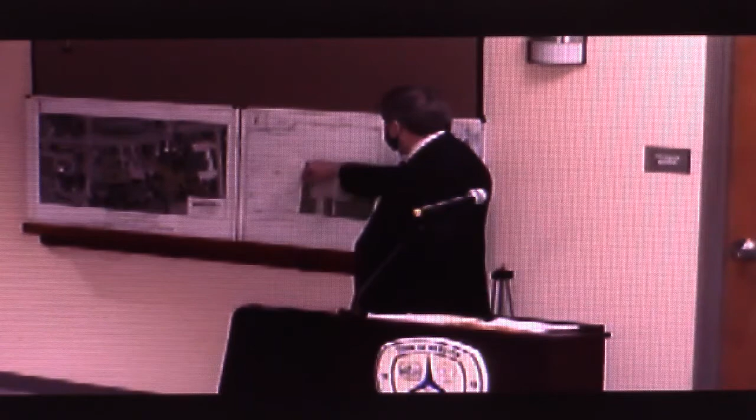This is part of the property which is owned by Ridge Road Webster LLC. The remainder of the property, as shown here, there is a house on the Jackson Road frontage which is going to stay. There are two houses here which are going to disappear - two lots along the Ridge Road frontage - and with a little bit of adjustment of lot lines, that comprises the Jiffy Lube parcel. That parcel is slightly less than the 45,000 square feet required in the MC district, and for that reason we will need an area variance.

In addition - I'm just going to hold on to the microphone - in addition, we will be applying for a use variance to allow the use as a Jiffy Lube at this particular corner. It's deemed to be an automotive type use, which is not a permitted use in the MC district.

However, there really is something very nice about this particular use on this corner, and that is that the Jiffy Lube operation is a traffic desert, if you will - there's no intensity of traffic on the site. The average number of cars utilizing the Jiffy Lube facility is typically between 30 to 35 a day, as opposed to if this were a standard MC use, which could see 30 to 35 cars per hour. That is really the benefit of this particular use at this location.

So Jiffy Lube itself has made inroads into the Rochester market with their newest development - it's actually a multi-care center. There is a location in Henrietta, which is in an out parcel in front of the Regal Theater.

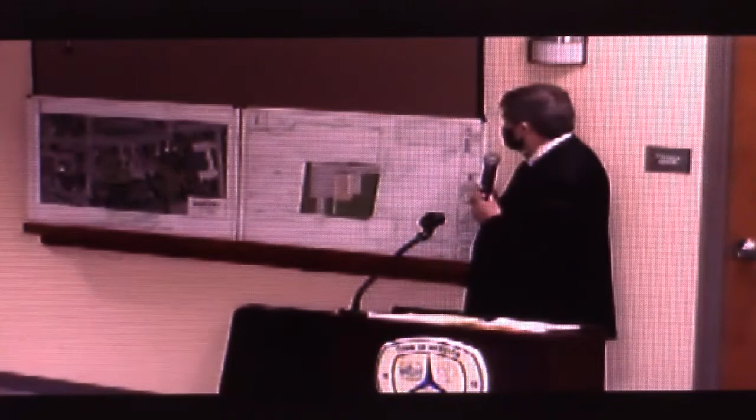Access to the site will be from two curb cuts, one on Ridge Road and one on Jackson Road, which is also a substantial benefit from the existing condition, which had multiple curb cuts on Ridge Road, and at least one on Jackson Road. So we are doing our part to benefit traffic, and of course we will have to have review from Monroe County Department of Transportation, Jackson Road being a county road, Ridge Road being a state road.

We had some early design on our elevations. We know the town's design guidelines are looking for something a little bit different, and we're going to be working on that. But typically the building would have a wainscot, a lower level with a particular architectural design, and then the upper level would also be somewhat different.

We're talking about darker earth tones on the site because we think that's in keeping with the development that has occurred along the Ridge Road corridor. Brick is being heavily considered, and we'll be prepared to discuss that further when we come back for formal site plan approval.

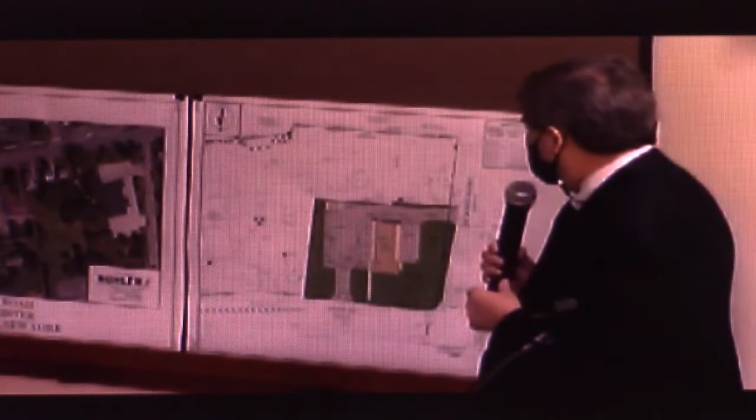Typically we see these Jiffy Lubes on a lot smaller parcel than the one we're talking about here.

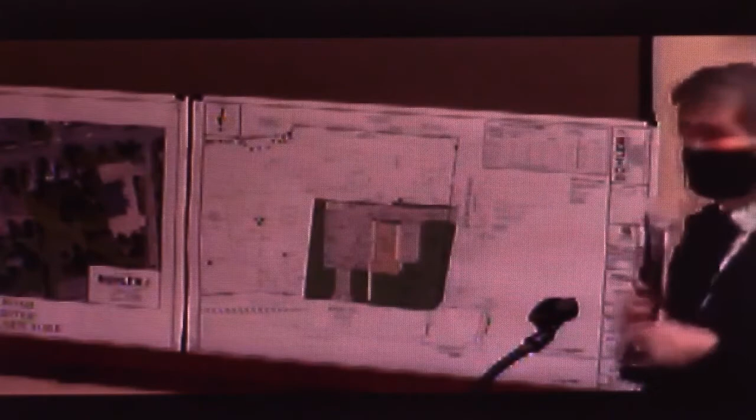You mentioned something about sign guidelines? Design guidelines, I'm sorry. We will ultimately be coming back to the board with sign guidelines. We do show some on the draft elevations submitted with the application, and we'll be doing an analysis of whether it totally conforms with code or whether it needs any relief or variances. We'll be taking a more critical look at that as we move to the next stage.

That was the point I was going to bring up tonight. I just thought there's an awful lot of signs. I hate to seem like Mr. Sign Guy tonight, but there seems like a lot of signs for one building, especially on the front elevation. You've got Jiffy Lube, and then Pennzoil, which I don't know if that would be considered a separate sign or not.

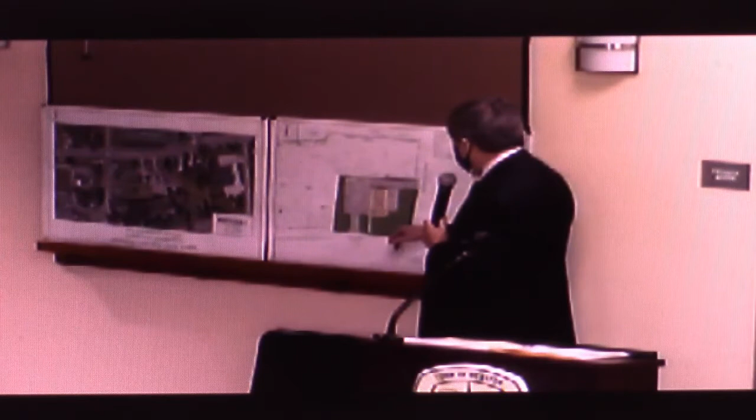That's something we'll review. I don't know if the measurement of the sign constitutes a box around the entire element or whether each piece is measured separately. I believe the code addresses that. We may need a variance for the second elevation. We're also talking about a monument sign, which is permitted under the code. That will be coming back as part of the site plan application and review. So thanks for that comment, Mark.

What's the code say, you have to have 45,000 square feet? Was that the lot size number for MC? 45? And what have you got, Jerry? 30? 34,936. 35. But we're really boxed in.

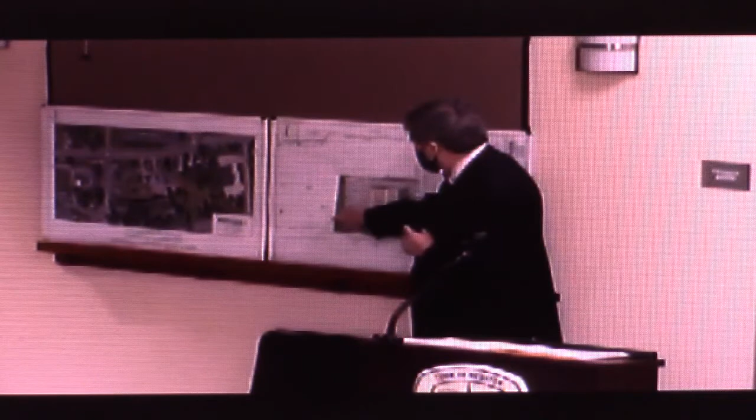There's really not much we can do because we're going to need a side setback variance over here for the house, literally, and this building is very close in that location. On that drawing, right where you had your finger - yes, go to the south, go to the south of the property, now go back to the west, where the property line is.

There's like a jog in it. Yeah, right over here? Yeah, there's a... okay, what am I looking at there? I'm not sure. Do you want to address that?

It sounds like it may have something to do with this easement, with the shed. There's an existing shed over here. We're trying not to disturb the remainder of the property, and that's what's really causing what we're doing. That little shed - it's on the easement there, isn't it?

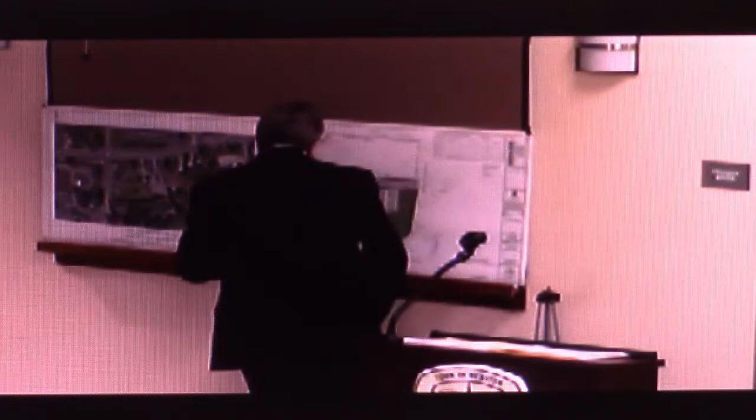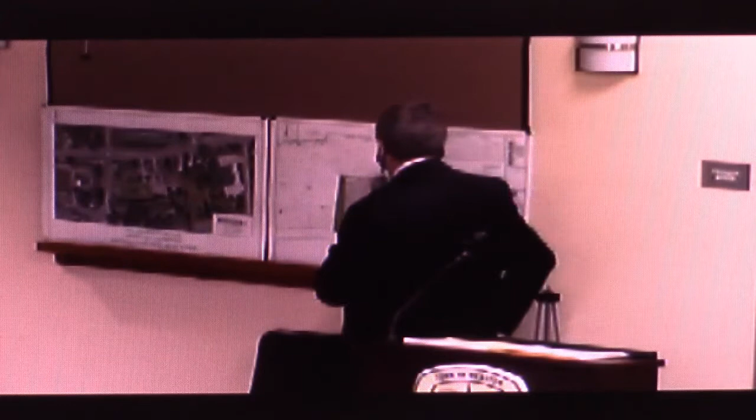I'm not sure exactly where the sewer line is within the easement. We show a center line, but I'm not sure exactly where it is. I trust the shed is not sitting on the easement, but I think we'll probably figure that out as we move forward. Well, the easement is the whole width though, right? Yeah, the easement is the whole width. But if the shed pre-existed, I really don't know when that sewer easement came in and for what purpose. I'm not sure what was there first.

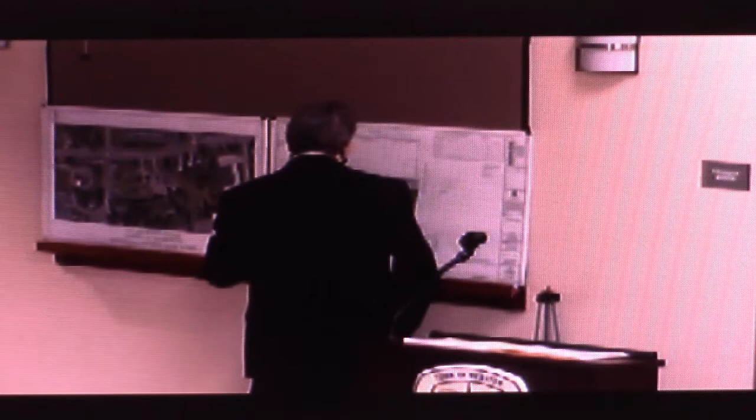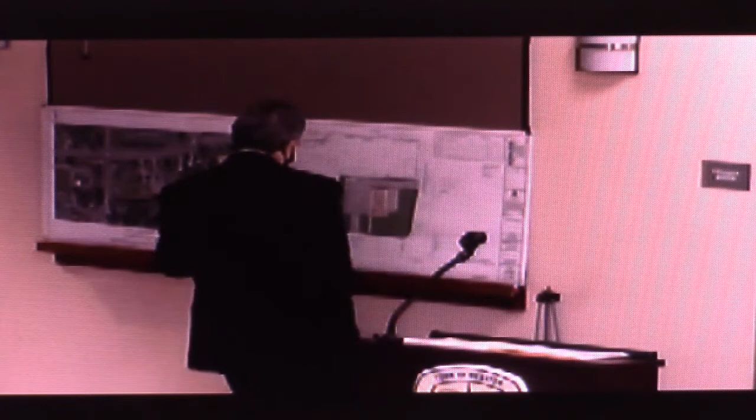What kind of a shed is it - is it a good shed or? What I'm getting at is, just to minimize your variance, if you could move that - it looks like it's probably about 5 foot, that jog, maybe? 4.3? So if you moved it up, you'd get another 4 foot by the length of that, which would be another 500 square feet - you'd be a whole lot closer to what's required.

Somewhat closer anyway to what your required square footage would be - you're minimizing it anyway. Yeah, we understand that. I don't know how important the shed is. For the record, my name is John Marth, Guggenheim Development, sorry.

Yes, I think really it was just as simple as - that's part of the retained lot. We saw that the shed was there in existence today, so we were just trying to put a small jog on the property line to honor and give that shed a little bit of space off of the new property line. That was really the only intention there.

That's something we can explore and take a look at. We would have to ask the existing property owner what his feeling is relative to that, and see if we can come up with something. But if we have another 500 square feet, we're still just shy of 40, so we would be in a variance situation in any event.

I'm surprised they didn't have the shed further south, not on the easement area, but. Yeah, like I said, I'm not sure who showed up first - whether the shed was there first or whether the easement was there first.

From the looks of the site, it looks like almost everything was there before anything else was there. So, well, anyways, there was a comment in there about that.

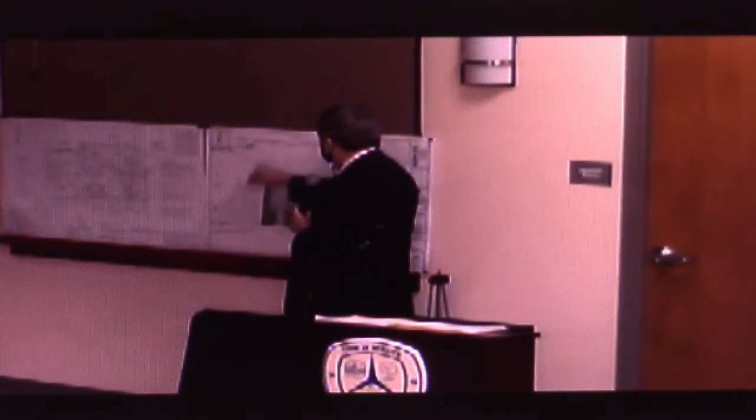This house currently is, I believe, a rental, which is owned by the property owner of the remainder over here, and of course he has signed off on that relative to the site. Now, we've seen a couple different proposals for this intersection before?

The biggest hindrance was always that sewer easement that runs across it. Every one of them always calls for the one lot and the one house remaining on Ridge Road. They always tend to show that thing as being demolished and taken away.

If this setback variance is granted, how would that affect future development for that lot? Talking about this lot on this side? Right, if you were to start tearing down the buildings there. Well, the remaining lot does have a fair amount of frontage along here, and we have no sense of what may or may not happen.

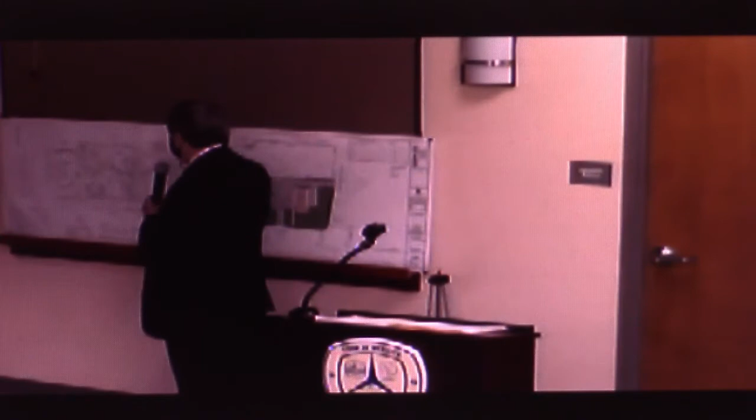The issue for this property owner is that he's been unable to get any traction with any site. I'm familiar with the fact that there have been prior applications for the overall site, and for lots of reasons they haven't worked. But the main feature is that we're taking almost an acre and turning it into a use that isn't generating a whole lot of traffic or activity.

So it's not our board, but the zoning board. If they ever granted a variance specific to this, what about any future development? Well, your point is well taken, because that leaves just that lot connecting to the other parcel to the east. There's not room to put a building there, and it can't be divided into separate lots. This would be a self-created hardship by doing this.

For future development, yes, for whoever owns the rest of the property. Well, what I'm wondering is, if we give them the variance for an 8-foot setback on this property line, and the next development comes in and tears everything down, is that variance still applicable for future development? Once the building goes, the setback really doesn't state anything, it has to be a foundation that's there.

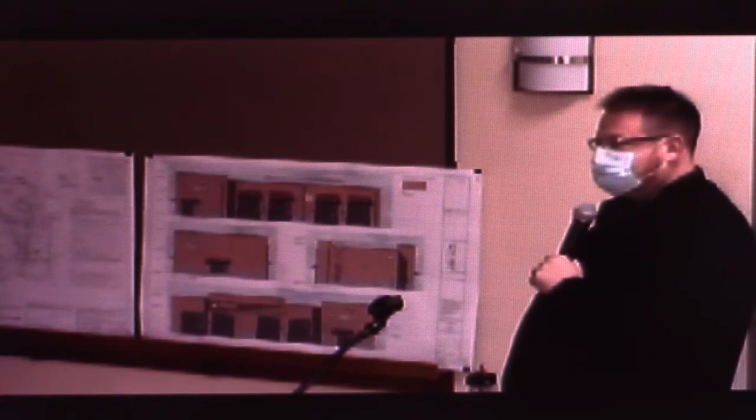So with the way you have it shown, where the big Jiffy Lube and the Pennzoil signs are, that's actually the facade that's mirror imaged - what you'd see from Jackson Road. My architect is going to get a phone call after this meeting.

But yeah, so the signage in totality is what we normally would like. Obviously we understand that there's going to be some reduction and some concessions made on signage, but yes, this sign package is what we typically go in with.

And we'll have to make some reductions here. But yeah, these are a little bit - it's what you would see if you flip it around, but they're mirror imaged, correct.

And so the top one up there, because that's a west-facing one, I gotta wonder why it would even have - it's mirror image, but the Jiffy Lube is actually facing east, and it makes me wonder the need for that. I guess it'd be almost like having a monument sign by the road when you're driving down, because the only people who would see that would be the people in the drive-through.

Yeah, I'm gonna retract and correct my statement yet again. This is good, now it's all coming clear to me. So this is the front elevation, however it's supposed to be mirrored.

It's mirror imaged - this is what we call the customer side of the building, and this layout's customer side belongs over here. So, again, I apologize to the board, we'll get this remedied, but this actually is what faces Jackson Road. This is the rear of the building with those service entrances, so when a car drives up in the back of the site, they know which bay to enter for whatever they're looking for. So, they're just backwards, that's all.

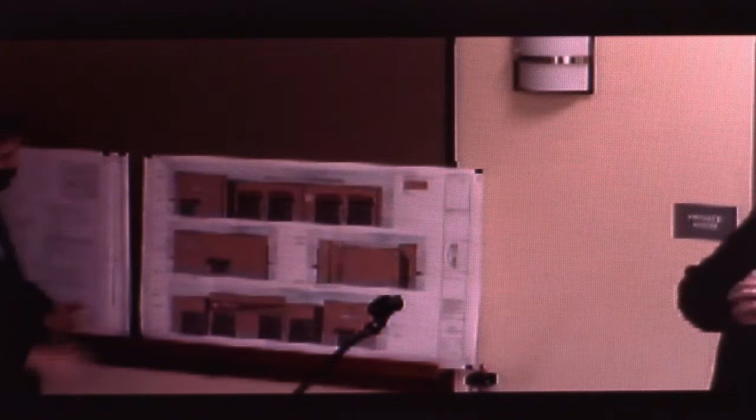You're messing with us here tonight, aren't you? Believe me, Mr. Chairman, the last thing I'd like to do tonight is mess with the board.

Well, I think it sounds like the board's okay with this project, but you need to fine tune, do whatever you need to do to make it work, I guess. Gotta get your variances and what have you.

Just on a site plan too, you got a monument sign and it's 10 feet off the Jackson Road right-of-way - I don't think that's gonna fly. Where are you, Derek? On the site plan, yeah, they have a proposed sign, it's a monument sign that's 22 feet off of Ridge Road, but it's only 10 feet off of Jackson Road. It's gotta be 25, yeah, gotta be 25.

And then in that same area too, you got your water service running through the middle of your proposed green space and stormwater management area. What do you envision as the stormwater management area? Is this subsurface? It's clearly not a pond that you're showing on here.

Is this subsurface chambers? Yeah, for the record, I'm Chris Boyer with Bohler Engineering, and we're very fortunate on this site from a stormwater standpoint. So there's a lot of good things from an engineering standpoint on this site. One, it's a redevelopment site - it's got a lot of properties on there right now, we'll be removing some of those and cleaning that up. Two, there's 4 lots, and we're reducing the number of lots here, so lots in general are going to get consolidated and sorted out better. And then three, the size of development we're trying to put here is very small - the overall lot is, I think, 0.84 acres. So it's small, and as Jerry mentioned, a lot of green space here. So from a stormwater standpoint, it's redevelopment, less than an acre, and we've got a lot of green space here, so it's not a heavy lift for stormwater. We're probably going to be able to solve it all with surface because of those credits that are here.

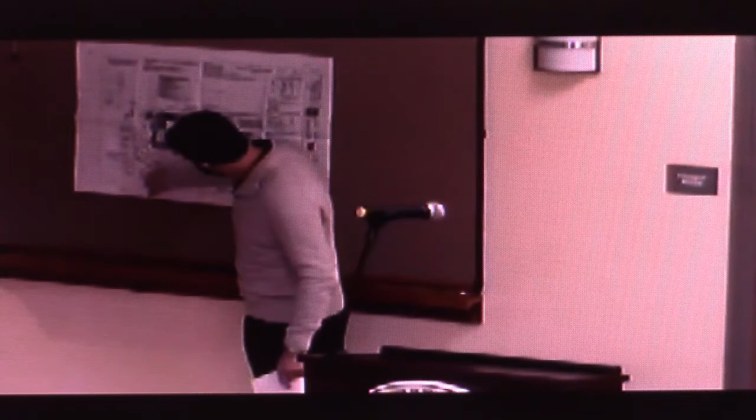That was part of the reason I was suggesting taking the last 2 or 3 parking spaces to the east and putting them up around the corner on the west side. That's right where the sharpest bend in the road is. That would keep a more consistent setback, more like the middle. Yeah, I could bring a few more spaces to put those 3 up at the other end.

I don't know what's up there. I see a bunch of squares, but I don't know what they are. Nothing, I guess - that's where there was a house at one time. There's a sign right there.

But if they could be moved that way, I think that would work. We could move a couple spots that way, 2 or 3 spots - that would bring you up to right about where that arrow shows, but I don't know what the scale is. What's the scale? Right here - one inch equals 40 feet.

So from... yeah, it's hard to really figure out. Here's the edge of the roadway right here. So you'd have, it looks like, about 30 feet maybe from the edge - you got about 30, 35 feet roughly.

Over here you have about 20 feet. If we take 2 out here, you have about 20 feet. Over here, about 35 feet.

Is that going to require a variance, Josh? For the parking? No. No, okay.